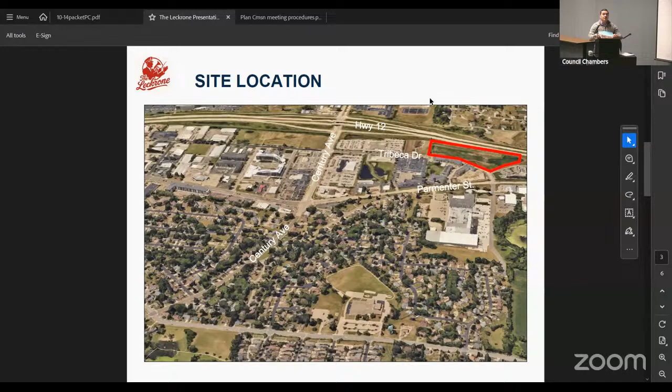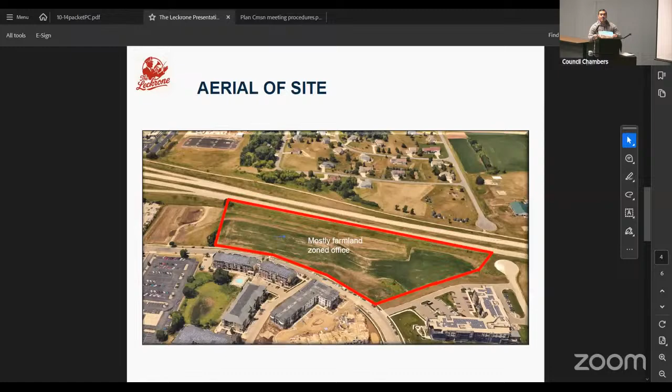Small correction here - obviously this is currently zoned PUDG, but I just wanted to provide a closer aerial view. Those two kind of L-shaped buildings I think are a little outdated, but those are an affordable development, I believe not too long ago.

And then the next slide - this is where I'd like to spend a little bit of time because obviously we're coming in for a rezoning. One of the reasons is that right now it's not zoned for multifamily housing of this density. I believe the hotel would be applicable, but we are proposing 7 multifamily dwellings. The total unit count would be 415.

As you can see, while I understand the thought of this pre-COVID world was to have this office park and corridor, the numbers post-COVID show only 56% of companies have said they're going fully hybrid. 75% of companies have said they just don't see the demand based on local analysis. There's vacancies of upwards of 40%, 30% in some areas, and without naming names, there's places that are just fully empty. I think that's a byproduct of this new hybrid office world that we live in.

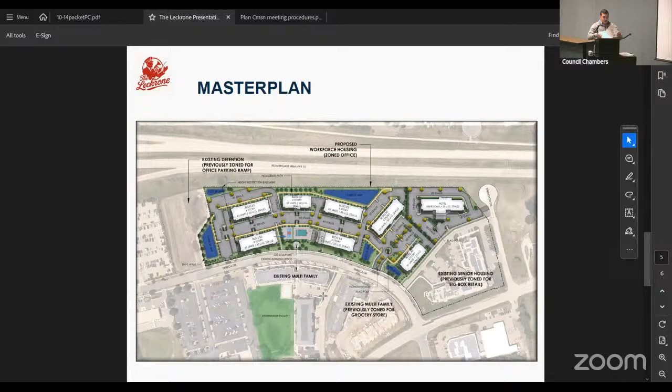As you can see, what was previously approved as senior existing housing was formerly planned as big box retail. That was a grocery store that was intended to be planned. And as I mentioned, to the left there, that's previously zoned for office parking. Obviously, that's what was intended to be there when that PUD was passed, but that was then made a detention pond of some sort. So with that, I don't want to be long-winded and I'll open it up for any questions or comments the committee might have.

We'll have ample opportunity to question you further on the agenda, but just wanted you to give us a little update. Thank you, Fernando.

Is there anybody here that would like to speak? Oh wait, you got to read something into the record first. Did you open the hearing? Yeah, he opened it at the beginning. Okay, thank you.

I have an email from Alder Myers, which I'm now sharing on the screen. He submitted this to us earlier today regarding the Leckrone, so I'll just read what's there.

He says: Good evening, members of the Plan Commission. Thank you for your service to the city of Middleton. I have seen how contentious some of these rezoning public hearings and related meetings can get, and I appreciate your committee's history of thoughtfully approaching the question of how and where we grow as a city. I am submitting this comment to share my own thoughts about that question as it relates to the Leckrone Holdings proposal before you today, as it is in my aldermanic district.

I am not in principle opposed to this project. It contains workforce housing and will add to our tax base. These are both good things. However, by rezoning this area for an almost exclusively residential use, you will be making that area the entire community car dependent. That means no walking trips to neighborhood stores, no meaningful neighborhood park interactions unless you own a dog, and no real sense of shared community, just a series of bedrooms.

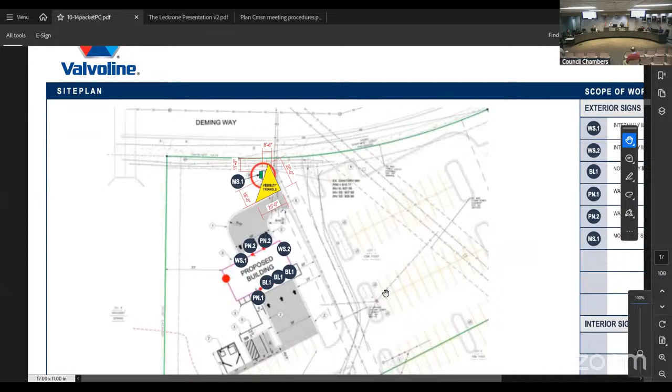Recommendation from staff is to approve the sign with the following conditions: locate the sign outside of the vision triangle, which is a 30 foot requirement for Deming Way, and outside of any easements. Two, reduce the monument sign height to 6 feet above ground level. And three, staff approval of a landscaping plan for the base of the monument sign.

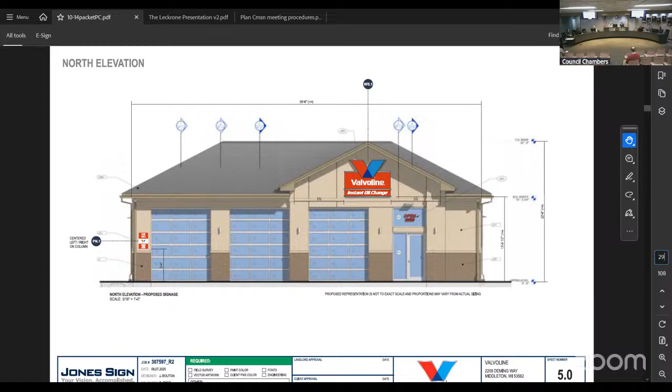With that, is there any discussion? I had a small concern, because we're talking about outdoor lighting, and we don't know how bright these internally lit signs are, and potentially they could be brighter than would really be acceptable for the neighborhood. It would be nice if they could incorporate some sort of dimmer system or other means to control the amount of light output, if we find it necessary. I'd leave it up to staff, so it could be dimmed down if we thought it needed.

Is there some kind of light output shown in the plan? We did not get a photometric. Scott handled this agenda item. He did reach out to the applicant to get more information, but I don't think he's heard back yet. We've not heard back from the applicant about the lumens or the photometric plan with the foot candles.

If that was added as a contingency, that's something we could look at to make sure it conforms. It's pretty easy to add a dimmer, especially before you assemble the thing.

But other than that, I'll go ahead and make a motion, with that addition to the staff recommendations, to approve the sign. Is there a second? I'll second. The second is from Bruce.

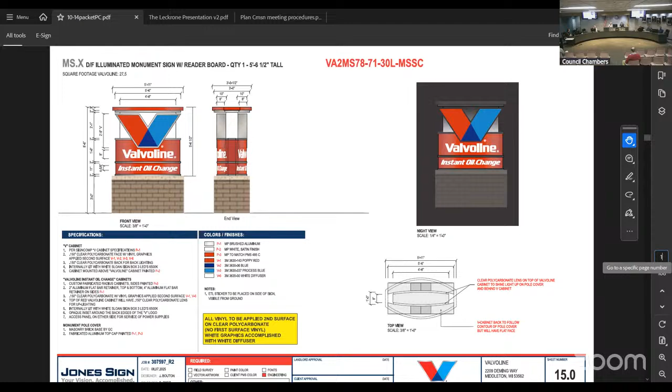All in favor? Well, can we get item number 4 spelled out for us, so we know what we're voting on? To have staff approval of... my addition, you're asking? Well, Scott, Daphne, did you write down how you would phrase it? It could be staff approval of a lighting plan that meets the city code requirements. But I believe his concern was also the lighting from the sign, so the lighting plan would need to incorporate the light output from the sign as well.

Right, because we got a photometric during site plan review, but it would need to be updated because we don't have it for the signs. Correct. Is that what we... okay, staff approval. And then I had a couple of questions.

How will the landscaping work so as not to obscure any part of the sign, given one of the contingencies is staff approval of a landscaping plan? Typically this is something we require for all monument signs, so they'll have smaller bushes along the bottom, where you see that brick, lining along the bottom area.

And does something like this require native plants as 75% of the points? I don't know if it would be 75%, but it requires something like this would need maybe 10 points total. So it could be very easy for them to include those native plantings.

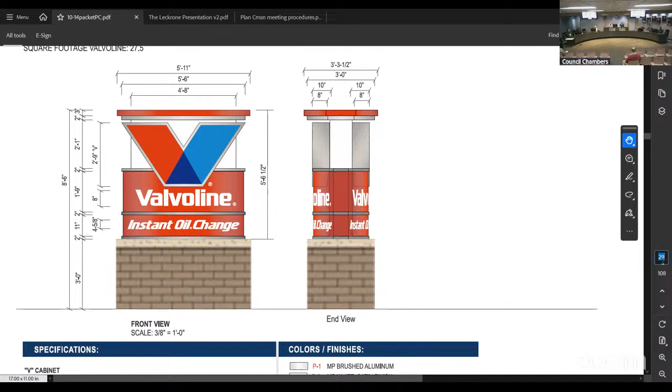Okay, turning over to page 2. Item 2 is the zoning map amendment for rezoning the PUD-G to MUA for the Leckrone.

It's not typical for us to vote on this the same day we do a public hearing. I think what we're just looking for on this item is any feedback you have, that we could incorporate into our findings of fact at the next meeting. So we have the right people here to hear it.

Any feedback? Amy, was there any consideration, and maybe this is for the applicant, to leave this within the existing PUD or PDD and just modify the general development plan accordingly?

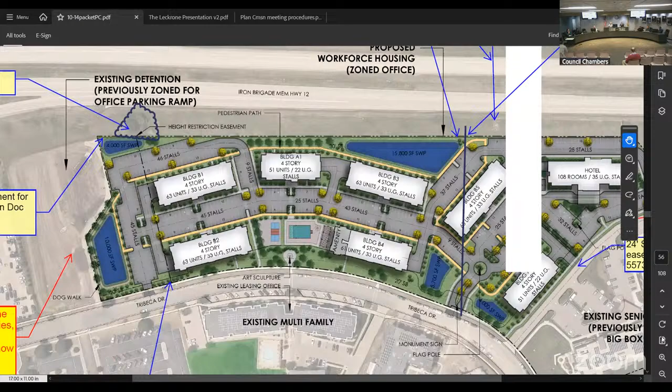That was the original proposal that Fernando had brought forward, to rezone it to PDD but have strictly multifamily housing. Our staff recommendation is if you're rezoning it strictly for multifamily, we would strongly prefer that you select a standard zoning district, because one of the goals of the zoning code was to try to rezone properties out of PDD.

In our opinion, there wasn't anything unique about this particular proposal that would justify the PDD zoning. We also had recommended a mixed use component. And if that were to be the direction of the plan commission, it likely would require PDD because this is not on a corner. So even this request for MUA zoning, there would not be any ground floor commercial requirement because there's not a corner lot.

And that was kind of where I was going with this, is if it goes MUA, we really don't have a lot more that we can do relative to design or input. The development was originally approved as a PDD, plan development, with commercial uses. I understand why we're not seeing that.

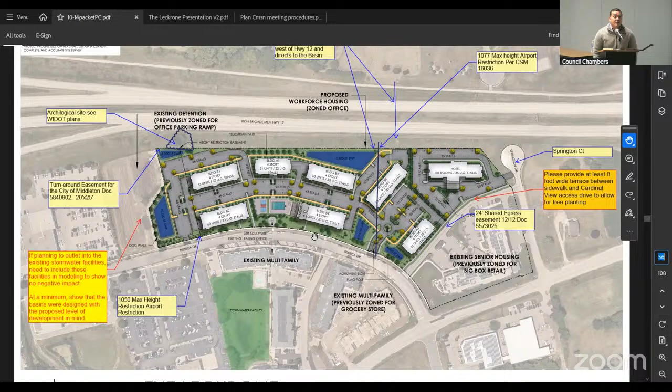So 20% of the units fall into the 60% range because that's the market rate for studios and one bedrooms - do I understand that correctly? It's not necessarily the market rate, it's the rents we're going on level with. And I don't think it would be within the 60% income band. There is an 80% income band within the workforce housing component.

Okay, thank you. I wanted to ask about parkland, but first can staff confirm the airport height restrictions? My read tells me a 6-story building would not exceed it. The airport height restrictions were added by our engineers - this is the 1050 max height, and I believe this area is around 950 for elevation, so it would allow around 8 stories comfortably. It should be within that height limitation.

Okay, thank you. With regard to parks, what is the distance from this development to the planned park at Bell Farm and also at the Garden District? Looking at this map and thinking of all the housing in this area, would it make sense to scrap the not-quite-Olympic-sized pool and pickleball courts for parkland?

Mr. Chair, I was going to ask the same thing. Do we have a map that's zoomed out a little further? I can just pull up the aerial if that works. Yep, that works.

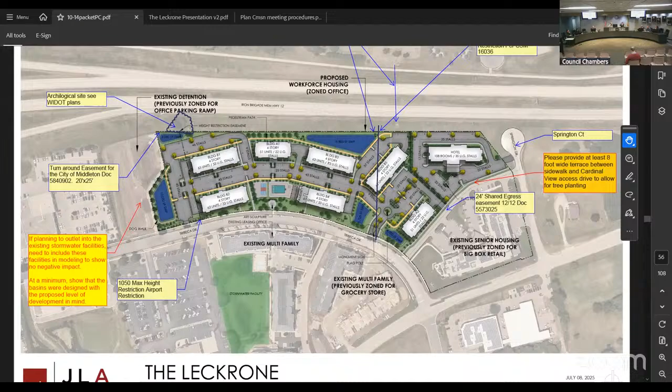So it's more than half a mile. I look at this and wonder, when fully developed, is this going to be another situation like the southwest, the Greenway Station part of the city, where we desperately need parkland and there's no land available? Yeah, and this is a pretty decent distance from the future Garden District Park as well. You'd have to cross Century Avenue to get down there.

This would be an area, especially with the existing units that are there, that would actually probably be a very good location for a public park. Although we'd have to discuss this, or have Kylie pull up the data on park service area maps, but there isn't much. Yeah, this would probably be a very good location for a small park, and that would reduce the fee in lieu.

Is that something you would consider? Well, absolutely. As we go through the process we want to be collaborative and are open to the committee's feedback. Obviously we have to talk to our architects and see how that reduces density, but we certainly want this to be a collaborative effort.

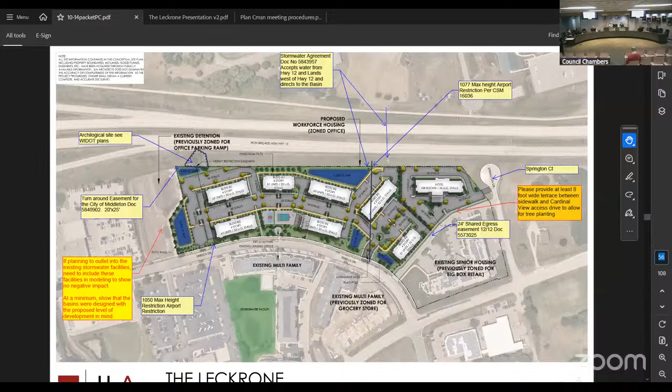On page 49 of the packet, you mentioned multifamily buildings will also include co-working spaces that tenants can use as needed, as well as Zoom rooms for remote workers. I really like that idea, and that could be something to consider. It's not quite retail or commercial, but it's a destination for people to walk over to, a nice co-working space where they can gather with others working from home. I think that would be a great amenity to have.

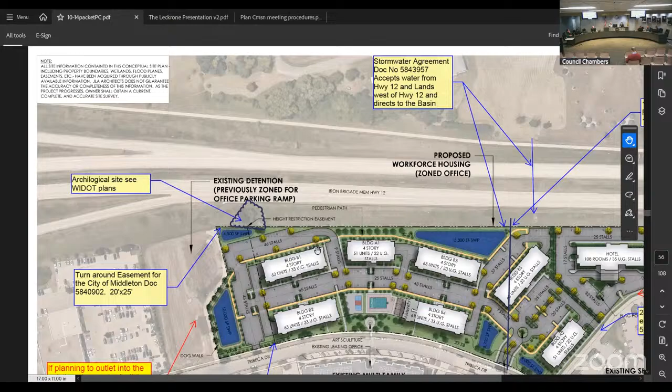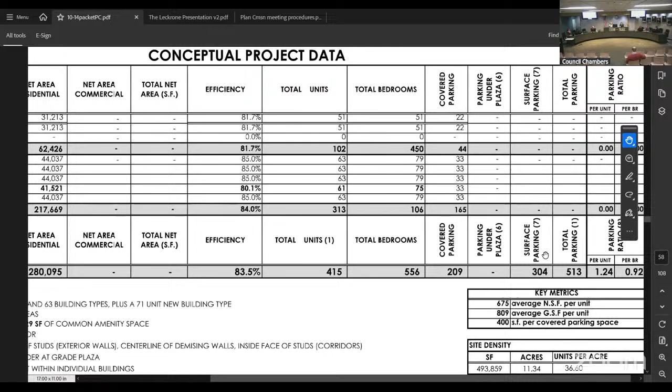Any other input? Yeah, the only other question related to parking would be about parking ratios - I didn't spend enough time looking at what parking ratio you're proposing. Do you know offhand? I can tell you that it meets the code. There you go, thank you so much. It looks like it's 1.24 parking spaces per unit.

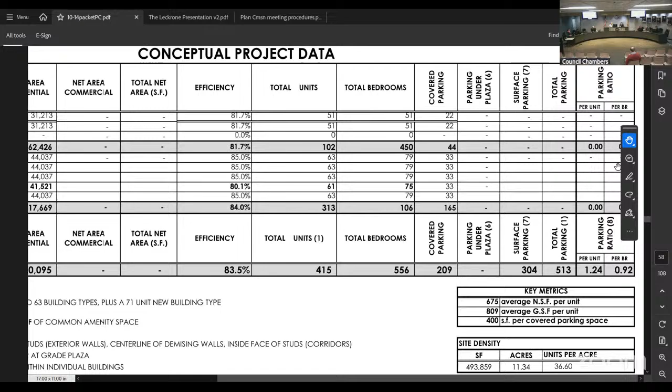So you mentioned renters by choice being a target for this. Does your market research show that the renters by choice are also big into cars, or are they sometimes transit people?

That's a great question. I would say this development is going to be a mix of young professionals, maybe some empty nesters, divorcees. I do know that since I've been in Dane County, I use the bus a little bit more than I used to, and I think Dane County as a whole is going that way. I'm not going to say we've done the research to say what this community is going to use as far as public transit.

But my thought would be that, seeing national trends and Dane County making public transit a focus, I think over time you can see some of that. I don't believe everyone intends to be car dependent, but I certainly respect your feedback.

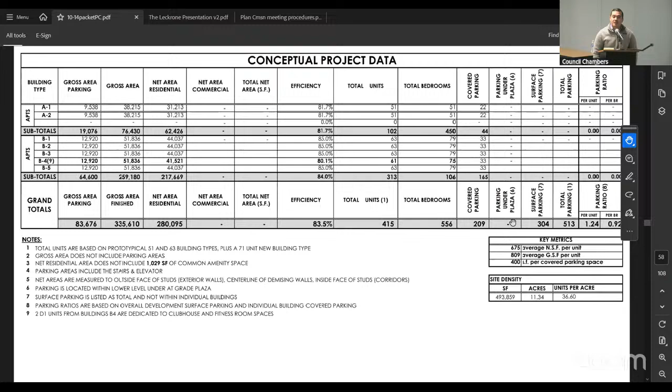Yeah, I'm just thinking, as an empty nester, once I'm ready to move into an apartment or a condo, I will also be downsizing cars. Most of the people I know are giving up their second car. So I mention that because, again, I'm concerned about all the pavement.

Our zoning code does allow for flexibility on the parking ratio. The plan commission can approve a reduced amount, which would be of interest to you. And then, thinking ahead—this goes beyond your development—to transit growing. This isn't my district, but just to the east of it is. I can see opportunities for new bus routes or changes to existing ones to serve the area that's being heavily developed right now. There's going to be quite a bit of density.

Any other input for our applicant? No, I just would—

The suggestion was made to go taller to provide the possibility for more parking within the building. I think that's one option. There might be other design options that would allow you to get more parking covered, so we don't see as much asphalt on the surface as we do now. I think it'll help with stormwater as well, and certainly helps with the livability of the community.

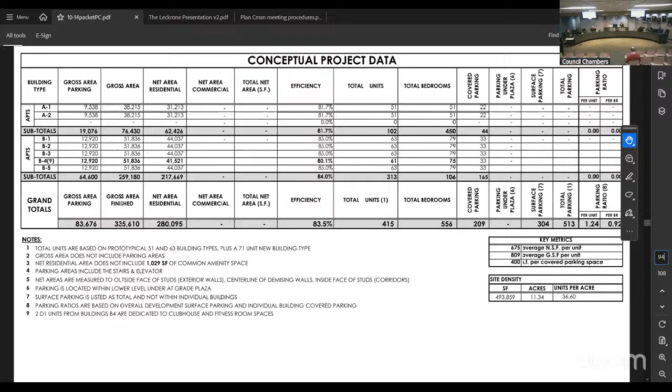Thank you, Fernando. Yeah, thank you. Thank you. Okay, that takes us to item 3 on the agenda, which is a revision to the lighting ordinance.

And we're just looking for some feedback for staff on the lighting ordinance based on public input, which is basically Smart Growth Middleton.

I had a question about wording on page 100, new paragraph number 6—the red one. It refers to waivers, exceptions, and exemptions, and I just want to make sure the wording is crystal clear. It could be that those are three different things, but I just flag that wording as something to maybe tighten up in the final version.

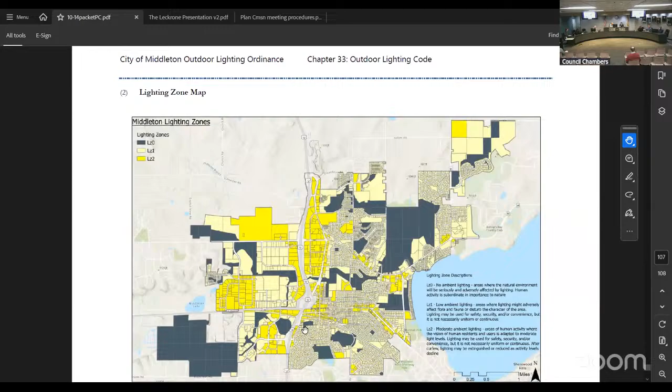And then we did get some written comments, specifically about 7621 Terrace needing to be downgraded. I don't know if you have a map to show that. The parcel abutting—well, actually 7621 Terrace doesn't even abut a downgraded parcel or a conservancy parcel.

But I brought this up last time. We say in the document that if it's conservancy zoning, that's when it's one level down. But this area south of Terrace Avenue—it may be the Quarry Hill Conservancy, but it's zoned institutional. So I think we need to be very clear about what we mean: do we mean zoned conservancy, or do we mean functions as a conservancy?

Because if it is zoned, then there are probably other places too on this map that we might need to change the different lighting districts. And I would not agree that 7621 Terrace needs to be downgraded.

Alder Hanero, is this comment that you received recent? These are in the packet. Oh, okay, from last time. I just wanted to make sure that we had a copy of it, from August. Thank you.

Other discussion, input for staff? Did we ask someone like PKK Lighting about Mr. Connor's concerns about having such restrictions that the parking lots and entryways could not be made safe and still be compliant? We didn't work with PKK Lighting, but we did run the ordinance by Dan Cowell, who was one of the representatives for the Middleton Medical Collaboration Building, because that was also going on at the same time we were discussing these. So we did run through a lot of that language with him, and part of his development was to be approved with the draft of this lighting ordinance, and he was able to work it out for that project at the very least. They did have a larger parking area in the front of their building that he was able to light under this ordinance.